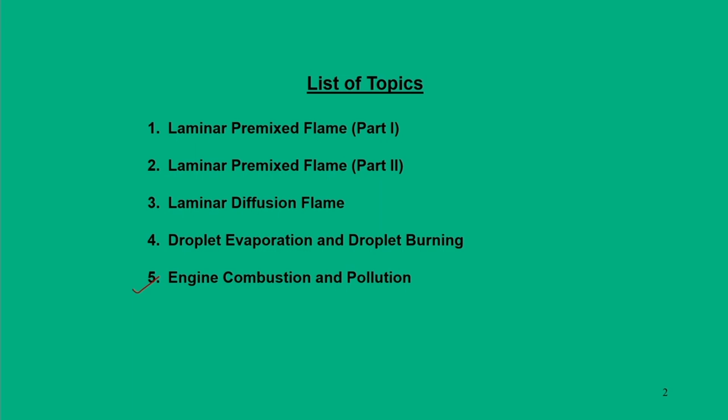Till this point of time, we have covered all the basic aspects of theoretical backgrounds and mathematical modeling of combustions, and in this lecture we will try to focus on the application part. Also, we will look into the pollution levels that come out after engine combustion, and if pollution has come out, what is the criteria of its quantification. So these things will be the focal point of our discussion today.

So, in this lecture number 32, engine combustion and pollutions, we will discuss the combustion phenomena in petrol engines, diesel engines, gas turbine engines and rocket engines. All these will be just preliminary conceptual thoughts on how this combustion phenomena happens. Subsequently, whatever methodology or mode of combustion we have looked into till this point, we will try to put a glimpse of how those concepts can be utilized in these engine combustions. And towards the last part of our discussion, we will discuss pollutant emissions and how to quantify these emissions.

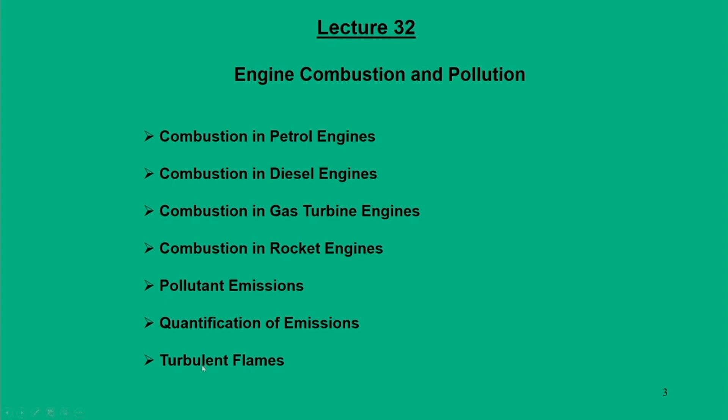One of the important aspects which was supposed to be in this combustion course was turbulent flames, but due to lack of time we will not be able to cover this. Instead, I will just put some introductory remarks on turbulent flames towards the end of this lecture.

So let us start with the first thing, combustion in petrol engines. We all know from the basic UG course on combustion in SI engines, spark ignition engines, that the combustion phenomena is mostly viewed as fuel and air mixtures entering into the engine cylinders, and towards the end of the compression stroke, the spark plug ignites the charge, and as a result combustion happens. This was the thought put forward when we discussed the IC engine course.

Now, adding further to our discussions so far, this particular nature of combustion falls under pre-mixed combustion, where the pre-mixed air and fuel is prepared locally as a homogeneous mixture. When it enters, a spark is generated, or we ignite the fuel through a spark, and through this we generate a flame front, and this flame front propagates into the combustion space.

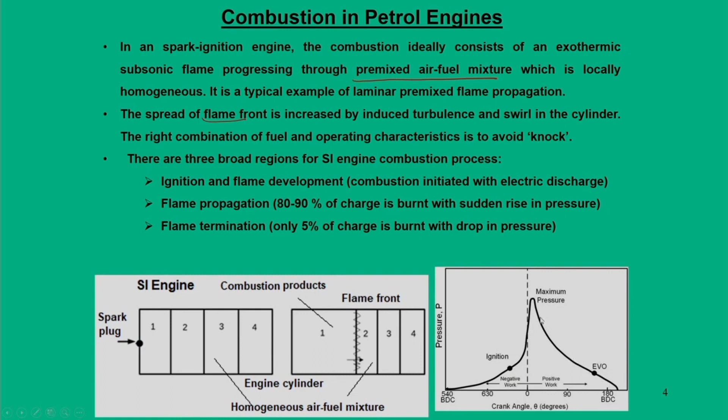Another important phenomenon in the spark ignition engine is knocking. During a normal combustion process, the flame front initiated in zone 1 subsequently burns the charge in the different zones, giving us normal combustion. But due to variety of reasons, if there is some rise in pressure or temperature in zone 3 or 4, not due to the flame front but due to self ignition, we get disturbances in the pressure pulse, and these disturbances are typically called knock.

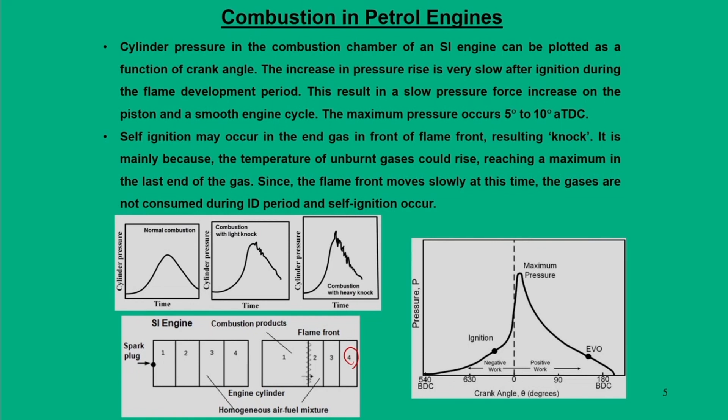In a normal combustion phenomenon, the trace of the pressure time diagram is smooth, whereas with knocking we find, towards the expansion stroke, a kind of oscillation that drops in towards the end phase of combustion. So if knocking has to happen, it is very likely that zone 4 is the most affected zone, or we can say zone 4 is the location at which we can expect self ignition due to knocking, and as a result of knocking.

Now we move to combustion in diesel engines. We know that diesel engines are not governed by Otto cycles, and it is a constant pressure based combustion. Here, instead of a pre-mixed air fuel mixture, air is compressed within the engine cylinder, and fuel is injected into this chamber through an injection process. We have seen two important concepts earlier: one is diffusion flame, the other is droplet combustion.

When a fuel jet comes through the injector, it forms a flame jet, as you can see here, which is a diffusion flame jet. In a constant density mode, we analyzed fuel jet injected into quiescent air. The same thing can be viewed here: when injected, it is in liquid form, and it sees a medium that is already heated air.

So the fuel liquid droplets get vaporized by seeing this environment. The fuel gets injected from the injector, and when it comes out, it sees an ambience which is compressed air at elevated pressure and temperature. As a result, self ignition occurs.

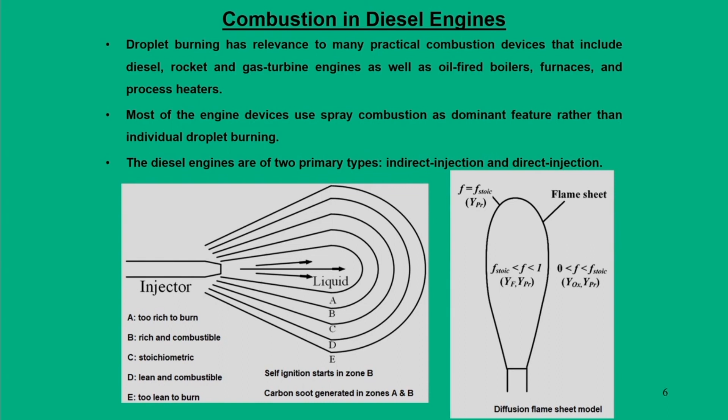In diesel engines specifically, there are different ways fuel injection can take place: one is indirect injection, the other is direct injection.

In indirect injection, fuel is injected under high pressure into the pre-combustion chamber. The fuel droplets begin to evaporate, and fuel vapor mixes with air in the chamber. Some portion of the fuel-air mixture auto-ignites, initiating non-premixed combustion, and because of this heat release, pressure rises in the pre-combustion chamber. Subsequently, the partially reacted fuel-air mixture and remaining fuel droplets mix with additional air in the main chamber to complete the burning process.

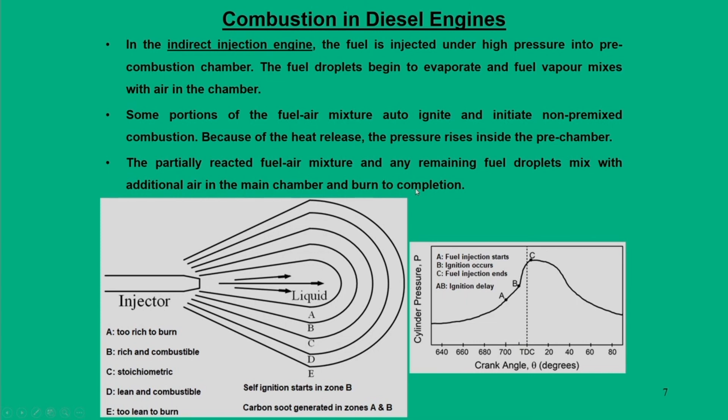The other category of injection systems is the direct injection systems. The recent advantage is that instead of the earlier pre-combustion chamber, we can inject fuel through a multi-hole fuel injector system, which is quite efficient in burning the fuel. In this process, the fuel-air mixture is governed by the injection process as well as the air motion within the combustion space.

Here the combustion phenomena is viewed as pre-mixed as well as diffusion-controlled mode. Diesel fuels are less volatile than SI engine fuels but they readily auto-ignite. The rate at which the fuel vaporizes and mixes with air is at par with the rate of reaction leading to auto ignition. Another important aspect is that when fuel is first injected into the chamber, it is not yet subjected to an ignition source.

When we talk about the ignition source, it means that within the entire combustion space there are some pockets or zones where fuel is expected to auto-ignite. Once that auto ignition takes place, a flame front is generated at that point, and subsequently the information is transferred to other zones as the flame propagates. Side by side, fuel is also parallelly injected. So the entire process is governed through a diffusion mode, since the ignition source, which is a pre-existing flame, is present when the fuel is injected.

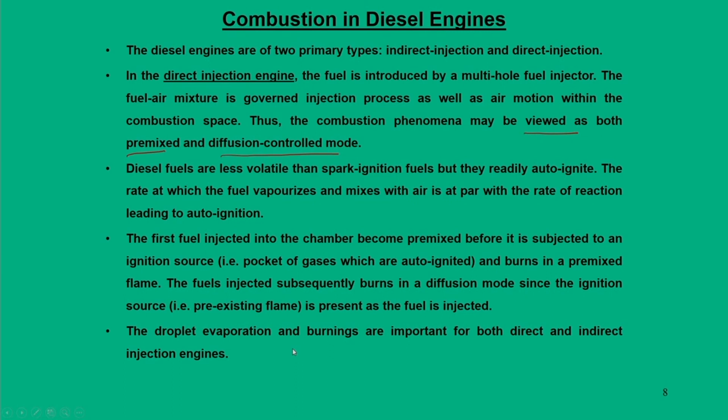Moving to the next type of combustion that we normally do in gas turbine engines. These gas turbine engines are usually employed in aircraft. Here it's a similar concept as diesel engines, but with a different philosophy or different technology.

Air comes into the system, meaning compressed air from the compressor unit comes into the combustor, and in these combustors we have fuel nozzles, typically incorporated in the primary zone. The fuel is injected into the air, and side by side the air motion, meaning the speed of the air, is also very high, so mixing takes place.

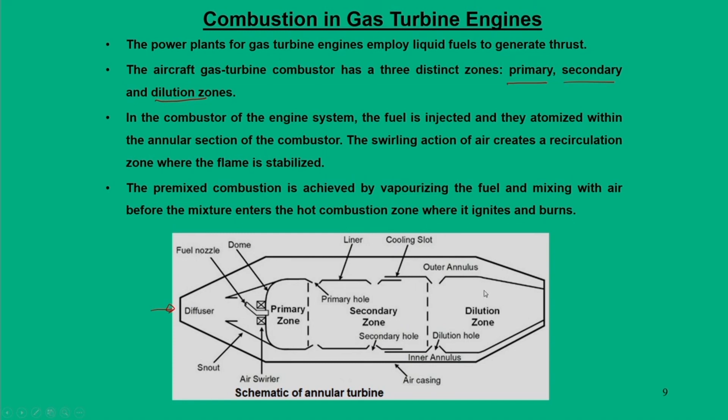In the secondary zone, we also supply fuel along with mixing or swirling actions, such that when it enters we get a stabilized combustion, or the flame gets stabilized. There is also a concept called liner cooling flow.

So if you look at another view of the sections, this particular section shows arrow lines which represent the air flow. These are the holes kept in the primary zone, secondary zone, and the dilution zone.

In addition to this primary air, we also have secondary air that comes from the compressors, and this is called liner cooling.

This liner cooling is required because we expect a particular temperature distribution toward the end of the combustion. When the flame is about to enter the turbine, we want the flame temperature distribution along the radial direction such that the turbine gets minimal thermal stress. So to achieve this, we require liner cooling.

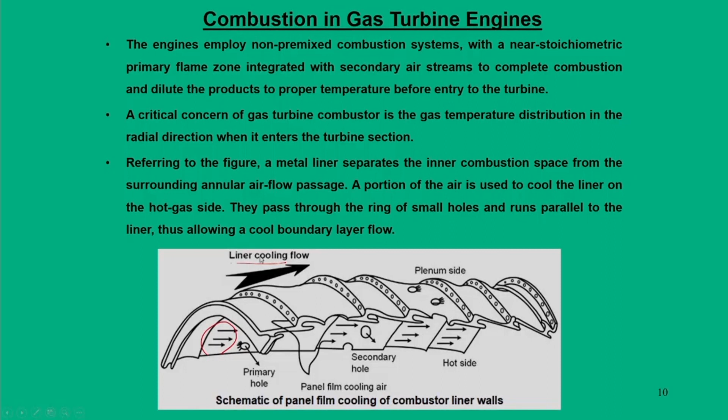So what do we mean by minimal stress? This is where the role of the dilution zone comes into picture. The turbine normally faces the highest temperature in a gas turbine engine, and these high temperatures or hotspot gases can damage the turbine blades. So in order to reduce this thermal endurance, we expect a particular temperature distribution across the turbine blades.

We expect that the gas turbine temperature has to be tailored to increase from the blade root through a maximum, then decrease at the tip. So the temperature profile has to be tailored such that it increases first, then as it reaches the blade tip, the temperature falls down.

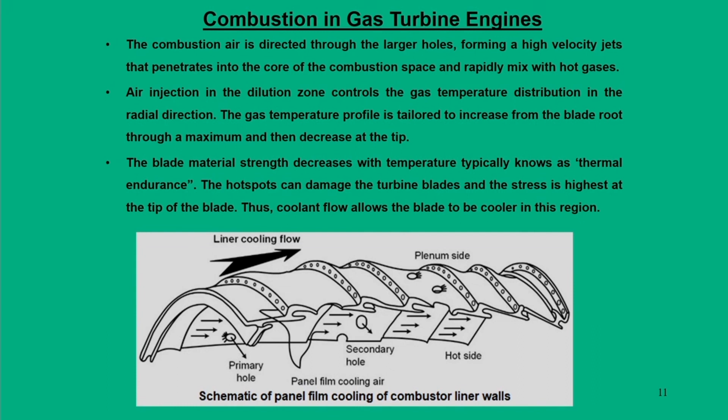So there the role of dilution zone comes into picture, and through this dilution zone we tailor the flame, giving a particular temperature distribution pattern such that the thermal endurance at the turbine blades gets minimized.

Such a temperature distribution pattern for the gas turbine combustor outlet is known as the pattern factor. Normally, the type of temperature distribution we require at the end of the combustor is nothing but the pattern factor, which has to be taken into account.

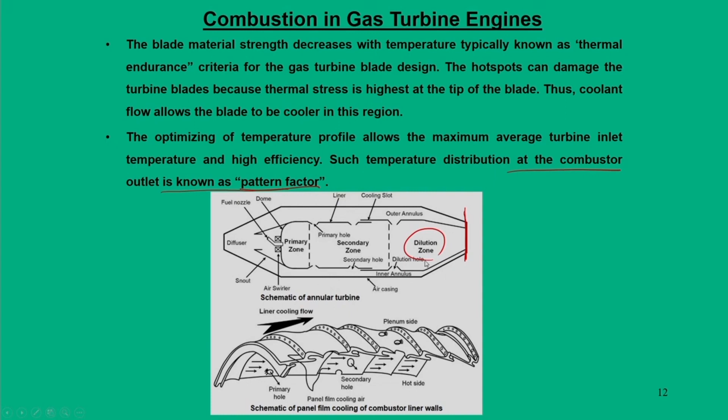For this, the dilution zone normally produces a kind of cooling effect for the flame to quench, and subsequently the entire combustion products expand. This is a different part of the discussion. This particular concept talks about gas turbine combustion.

The next part: when you travel faster, gas combustion will not happen the same way. We require some other technology where we should avoid the use of mechanical devices. Rather, we expect phenomena through shock waves or shock-assisted combustion to come into picture.

When you travel faster, and also when going to very high altitudes, there is a lack of oxygen or oxidizers. So rocket engines normally carry fuel and oxidizers in separate tanks, typically liquid hydrogen and liquid oxygen. The concentration in liquid form is done because they have large energy density compared to the gas phase mode.

There are two types of combustor systems: one is pressure fed type, the other is pump fed type. In the pressure fed type, shown in this figure, we have a high pressure gas that pressurizes the fuel and oxidizer tank through the propellant valve. As a result, the fuel is injected into the thrust chamber.

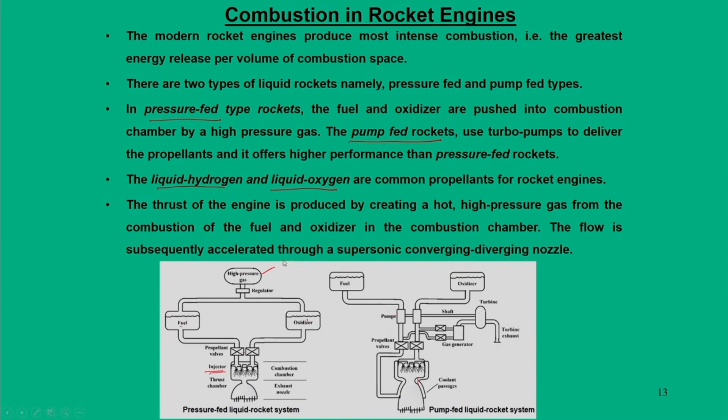Whereas in a pump fed type, we do not have this high pressure gas medium; rather we have two different pumps that give the necessary pressure for the propellant valve to inject fuel into the combustion zone. The thrust of the engine is produced by creating hot, high pressure gas from the combustion of fuel and oxidizer in the combustion chamber. The flow is subsequently accelerated through the supersonic converging-diverging nozzles.

The type of combustion that happens is droplet combustion, since it's a droplet kind of process. Here we can also think of premixed and diffusion burning, which is likely to happen in a rocket combustion mode.

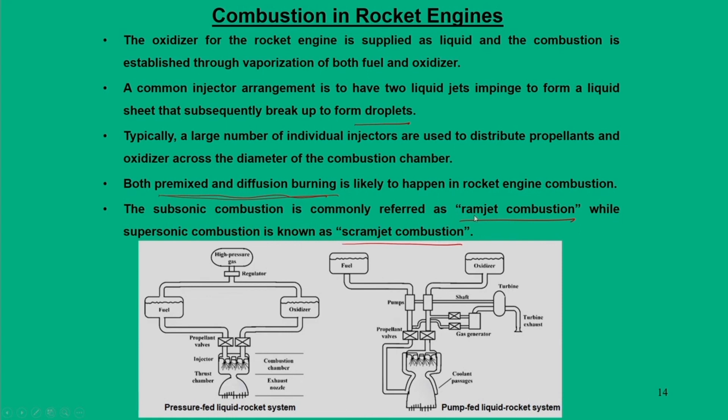Another important aspect is that when you think about rocket combustions, subsonic combustion is normally referred to as ramjet combustion, and supersonic combustion is referred to as scramjet combustion. These are different terminologies used in rocket engines.

The next important aspect we are going to discuss is pollutant emissions. The control of pollutant emissions is a major factor in the design of modern combustion systems, because the primary pollutants emitted directly from the source undergo many chemical reactions that affect the atmosphere. When such reactions take place, they affect the environment as well as human health in many ways.

First is altered properties of the atmosphere, because combustion changes atmospheric air quality. They are harmful for vegetation, they damage soils, deteriorate materials, and there is a potential increase in sickness and mortality of human beings. These are the kinds of societal loss due to pollution.

Typically in engine combustion, the types of pollutants are: first, particulate matter, which comes as soot particles, fly ash, metal fumes, and aerosols that we can see in the atmosphere. Then we have sulfur oxides, either as SO2 or SO3. Then we may have unburnt or partially burnt hydrocarbons, and oxides of nitrogen, NOx, typically NO2 or NO.

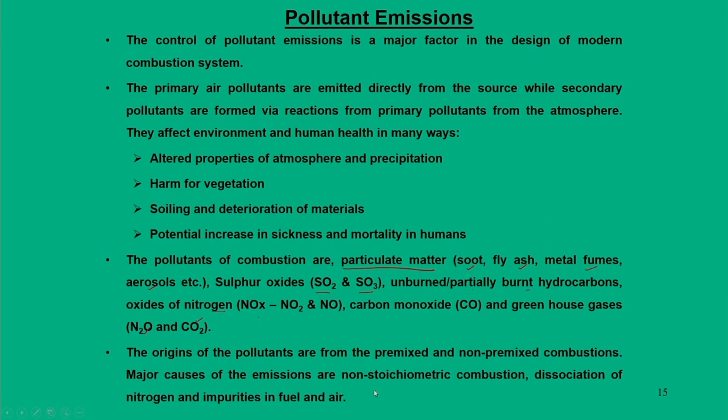Now let us see how those pollutant emissions affect human life and the atmosphere. The undesirable emissions generated during combustion processes of automobiles and IC engines pollute the environment, and they contribute to global warming, acid rain, smog, odor, and respiratory and health issues.

One major concern with pollutants is in the troposphere, which is the lowest layer of the atmosphere. What happens there is the emission of NOx—when you talk about civil transport aircraft at lower altitudes, normally they travel at 30,000 feet altitude. At that location, the emission of NOx becomes a vital factor.

If you look at the atmosphere, it is covered with an ozone layer, and this ozone layer protects against sunlight. Various wavelengths of sunlight get blocked by the ozone layer and do not come back to the earth's surface. But what this pollution does is create or break that ozone layer.

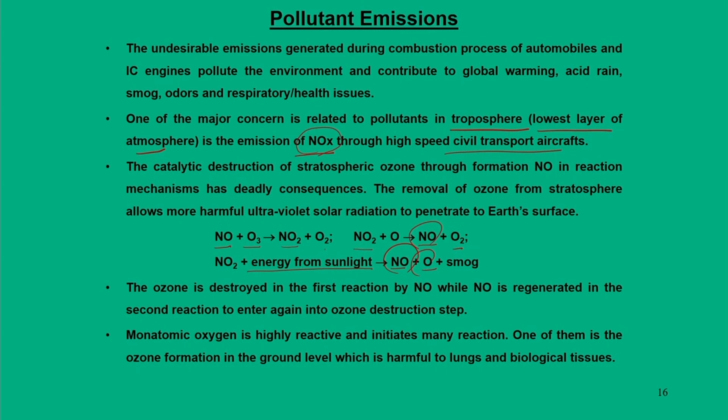Another important aspect is that monoatomic oxygen is highly reactive, so it initiates many reactions. One of them is ozone formation at the ground level, which is harmful for lungs and biological tissues. Ozone, although it protects against sunlight, at ground level has a harmful effect on human bodies. These are the side effects of pollutants.

Now let us see how you can quantify the emissions. One way is representing it as an emission index. The emission index for any species formed due to combustion, denoted I, is the ratio of mass of the species to the mass of fuel burnt by the combustion process. This emission index EI is a dimensionless quantity, but we typically represent it as grams per kg of fuel, so that we can quantify it properly.

This EI expresses the amount of pollutant that is formed per unit mass of the fuel, independent of any dilution of the product streams or efficiency of the combustion process. This EI can be treated as the measure of efficiency of a particular combustion process in producing a particular pollutant.

The combustion of hydrocarbon fuels in air is determined through concentration or mole fraction measurements, assuming the fuel carbon appears as CO2 or CO. So one way to look at it is to define the term emission index EI for species I as the mass of species I emitted per kg of fuel burnt.

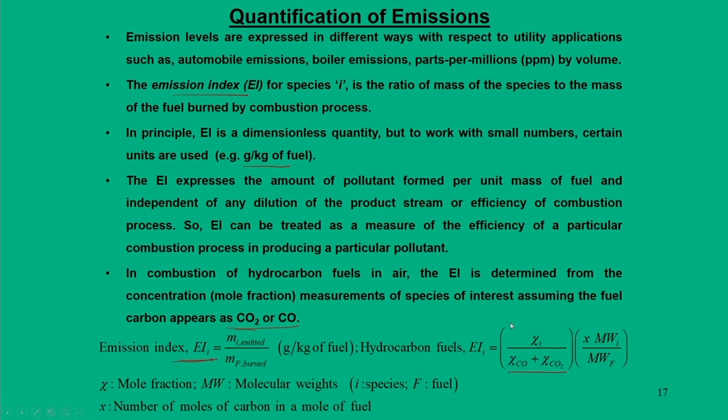Now if you want to express this in molar form, the parameter of interest is either CO2 or CO, and we have to normalize species I with respect to CO and CO2. Each of them can be found through these chemical reactions, where X is the mole fraction and MW stands for the molecular weight. So these are the definitions.

Another way to quantify these emissions is normally done through a gas analyzer. We take a strip of gas, a certain quantity of gas, at the end of the combustion pipe. Taking that sample, we try to measure it. Now if you look at the combustion equation for a hydrocarbon fuel, say CxHy is the fuel, it mixes with air with a quantity of oxygen and 3.76 times a quantity of nitrogen.

Ideally it should give CO2, H2O, O2, N2, and there are some trace species, and these trace species could be formation of CO, NO, depending on the nature of the mixture.

Now here the one important point is that whatever trace species appears in these reactions can be controlled through the quantity B, meaning that can be linked or correlated with the equivalent quantity of oxygen through the parameter B.

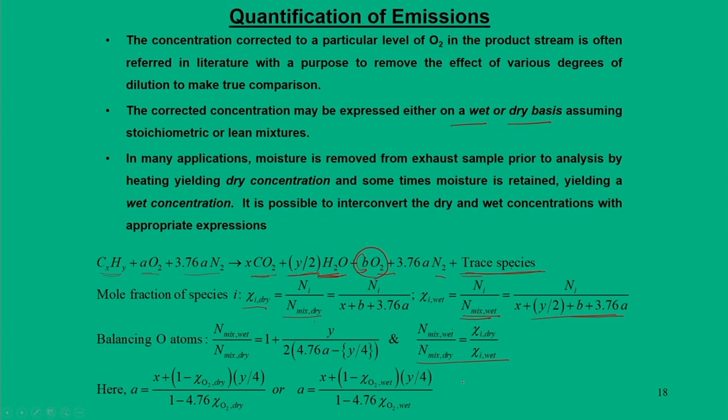Another way of looking at it: when we are measuring the emissions through gas analyzers, we are measuring at a certain level, level 1. So at level 1 we are measuring some O2, and this has to be corrected to another level of O2, meaning that if I change or control the combustion parameters so that we get another level of O2, then what would be the concentration of this species.

So basically the trace species regulations can be controlled through an appropriate measure related to the oxygen concentrations. Simple algebraic equations can be formed for a particular trace species I with respect to its concentration at level 2 and level 1, and they can be correlated with respect to the mixture of oxygen at level 1 and level 2. These things will be explained when you solve the problem, a numerical problem towards the end of this class, where we will explain more details.

So this is all about the quantification of emissions, and there are some other methods typically called mass specific emission, MSE, which is defined in terms of emission index and brake power. We also have specific emissions defined in terms of fuel energy, that is enthalpy of combustion, and emission index. So different philosophies or different applications require the quantification of emissions from different perspectives.

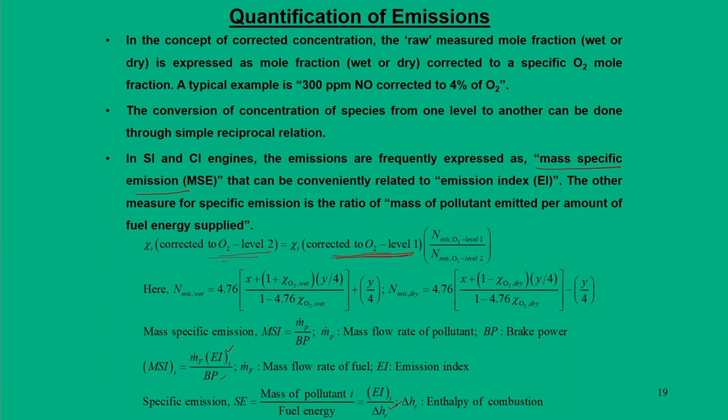This is all about the content. Now I am going to the last segment, which was supposed to be part of this course, but due to lack of time and the nature of the course, it is very difficult to follow turbulent flames. I will just end this combustion discussion with an introduction to turbulent flames.

In the combustion module we discussed premixed combustion, non-premixed combustion, laminar premixed flame, diffusion flames, droplet combustion, droplet burning - all these concepts we introduced. What we have not covered, and to some extent tried to see, is how they can be mathematically modeled. By looking at these equations, we can judge that when we bring in more equations, the complexity becomes tremendous - a very significant complication happens. This is exactly what happens in turbulent flow situations.

Typically the same concepts of premixed combustion and non-premixed combustion are equally applicable, but due to the nature of the equations, we end up with complicated equations that are almost difficult to solve.

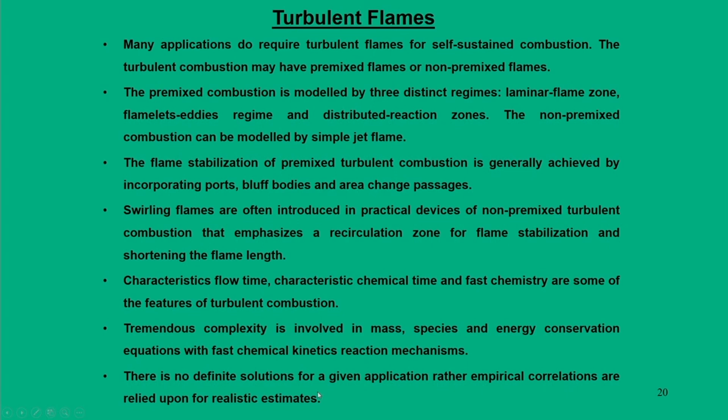So this I leave to the research space for individuals to look into, and of course the final note I can say is that there is no definite solution for a given application, and many times empirical correlations are relied upon for realistic estimates.

The last part I will try to solve a numerical problem based on quantification of emissions. The problem statement says that in an engine test which uses iso-octane fuel, we measure the exhaust products by volume on dry basis, and they are CO2, CO, O2, NO, and C6H14 equivalent. These are the trace species we need to find, and we need to find the emission index of unburnt hydrocarbons.

So instead of unburnt hydrocarbons, we have introduced C6H14 or hexane equivalent.

To do this, first we have to recall the definition of emission index. So EI for species i, with i being C6H14, by definition we write: concentration of C6H14 divided by the concentration of CO plus concentration of CO2, multiplied by X times the molecular weight of the species, which is C6H14 hexane, divided by the molecular weight of the fuel.

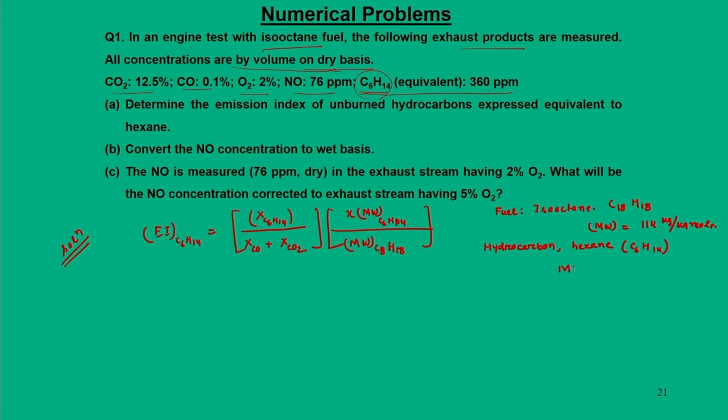And when we talk about the hydrocarbon, this is the hexane equivalent, C6H14, whose molecular weight is 86 kg per kg mole.

Now what is X? X is the number of moles of carbon per mole of fuel. So 1 mole of fuel, C8H18, contains 8 carbon atoms. So we can say X is equal to 8.

And what data has been given? The concentration X_CO is given as 0.1%, that is 0.001. X_CO2 is given as 12.5%, that is 0.125. So we have all the values here.

Now inserting the values, we can estimate the emission index with hexane equivalent, C6H14, as 0.0172 kg per kg of fuel, or ideally 17 grams per kg of fuel, which means if you take 1 kg of iso-octane (C8H18), it will give you about 17.2 grams of unburnt hydrocarbons equivalent to hexane. So this is what it means.

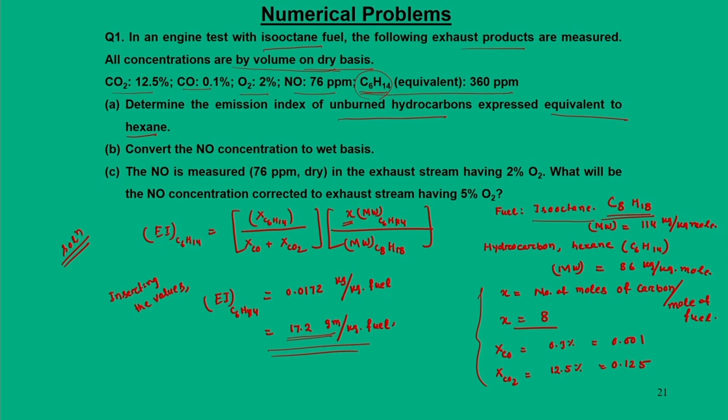Next, for the same problem, we are going to find the NO concentration on a wet basis, and for this we have to recall the conversion of dry concentration to wet concentration. So we recall the expression: X_NO wet is equal to X_NO dry multiplied by N mixture dry divided by N mixture wet.

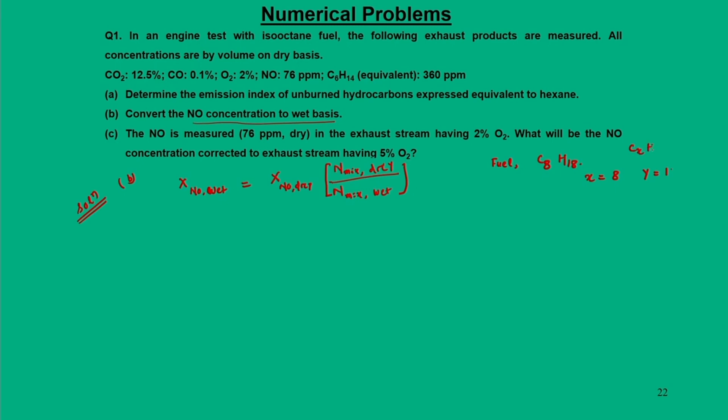So we have fuel C8H18, where we can say X is equal to 8 and Y is equal to 18. So if you say CxHy, Y will be 18.

So, this is fuel, and this ratio N mixture wet divided by N mixture dry has this relation, that is 1 plus Y by 2 into 4.76 A minus Y by 4. Now, in this case we need to find out what is A, because we all know Y. So, A is defined as X plus 1 minus XiO2 dry, because we are finding out dry first, into Y by 4 divided by 1 minus 4.76 XiO2 dry, because the data given is on dry basis. So, XO2 is given as 2%, that is 0.02. Accordingly we can find out A as 13.7. We know X, we know Y, we know Xi O2 dry. So, A is 13.7.